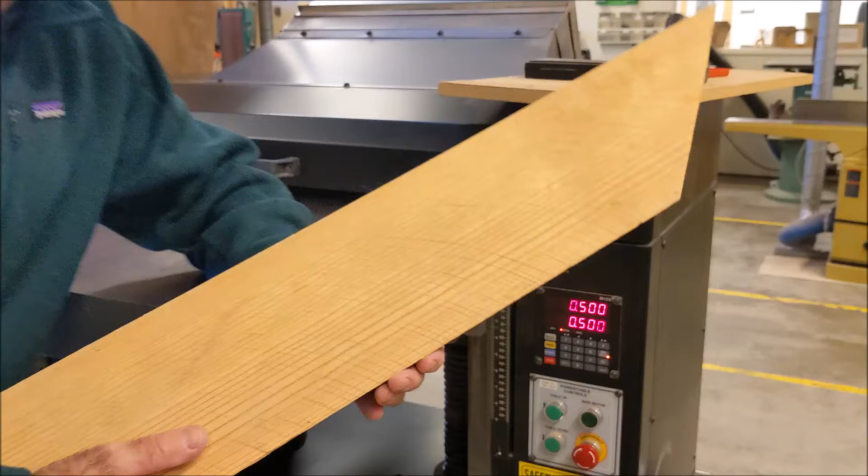Today I'm going to take those scraps from that shed I built out of the hand-milled pine. I brought all the scraps into the school and we're going to do wood projects out of those scraps.

So step one, before I do anything, is surfacing, and the way I'm going to surface it is I'm going to plane top and bottom, then I'm going to joint this edge, and then I'll show you what easy project I'm going to make out of this. Again, these are pine trees that came down on my property, milled them up right there, built a building out of them, and reusing the scraps on them.

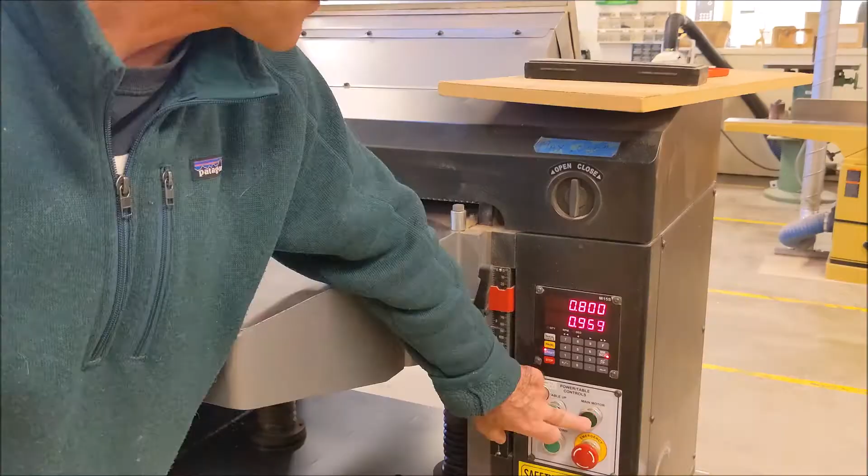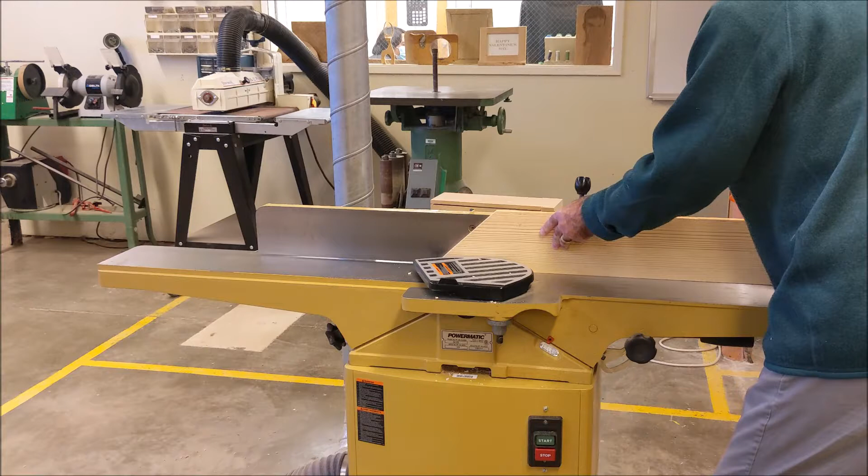Over to the jointer to get a straight edge. Surface 1, 2, 3. Over to the table saw to get the fourth edge. Surface 4 sides. I'm going to leave these on as tabs to hold it down.

Here's the project. Holds 2 wine glasses over a bottle of sparkling cider. This is our rough prototype. So we did this with hand tools, and we're going to work backwards from here to design and build it on the CNC. Here's my working prototype. Not that well refined, but the CNC will come out great.

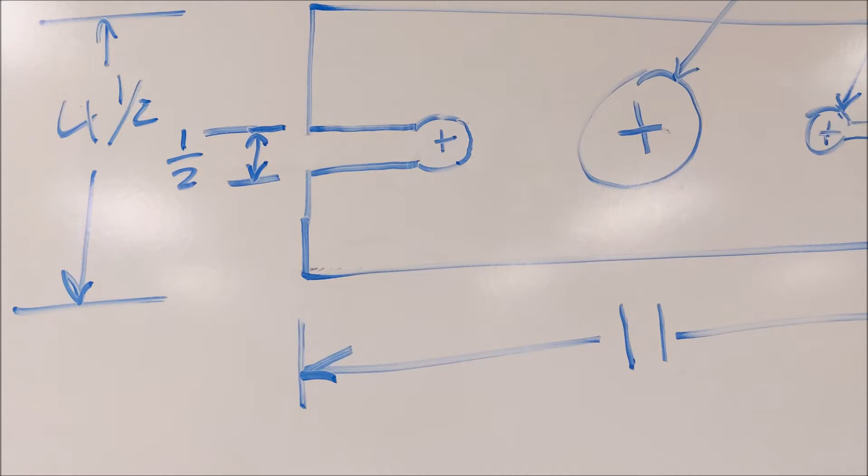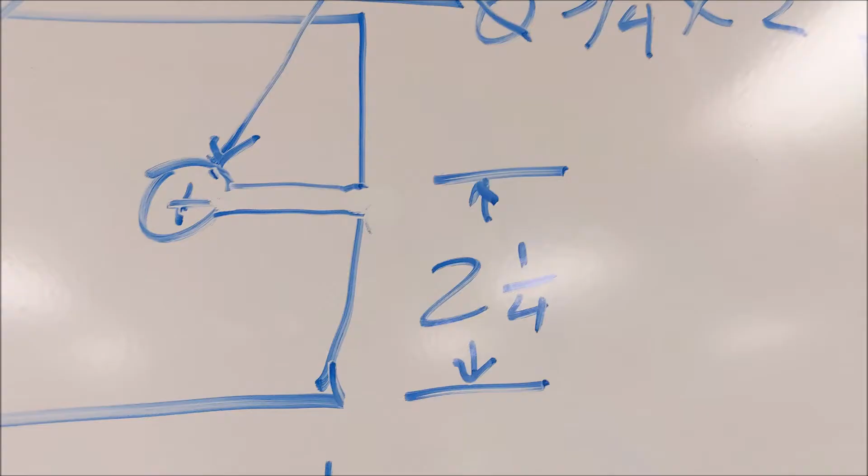From my working prototype, I need to sketch it out in my notebook. So here it is sketched out. It's 11 by 4.5. That little circle right there, and that circle on that end for the wine glass is 3/4. So that's diameter 3/4 times 2. So we'll put a right side view to show the thickness of the board, 3/4. So all drawn out. Now over to Mastercam to draw it on the CNC and then run it.

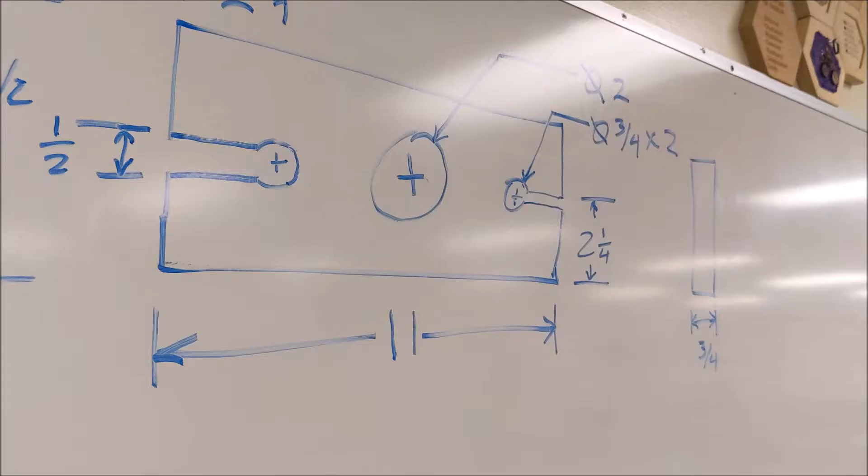Okay, let me run through this in Mastercam as quickly as I can. This is Mastercam X7. If you're using a different software, a lot of the tools and functions and the toolpathing is probably all the same. All the ideas are the same. So looking at my screen here, first thing I do is I go machine type router, and I select the tool I'm working with. It's Techno RMD7. That brings up my property manager.

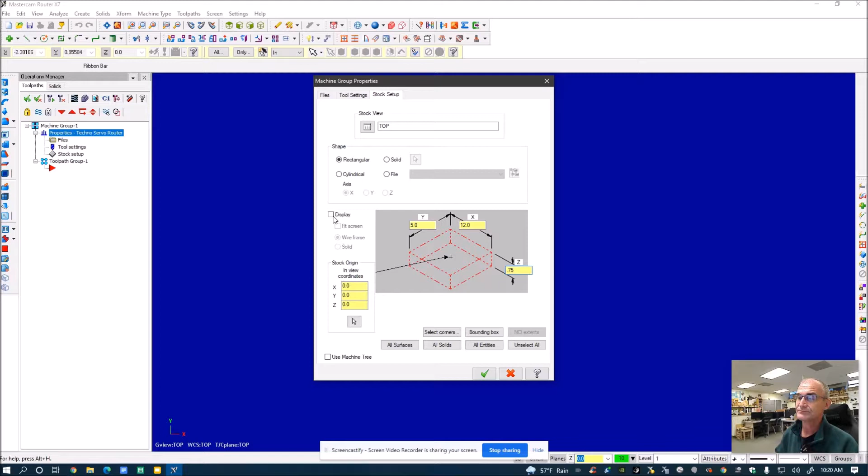I click on properties, stock setup, and I'm gonna, on my big screen here, bring it over here. This stock setup is the size of the wood, not the piece you're cutting out. So in the Y direction, let's say my stock is 5 by 12, but I planed it down to 0.75. Important that I have the cursor in the top center right here. And if I click display, it'll show this box on my screen. Next thing I do is hit F9 to get my Cartesian coordinates.

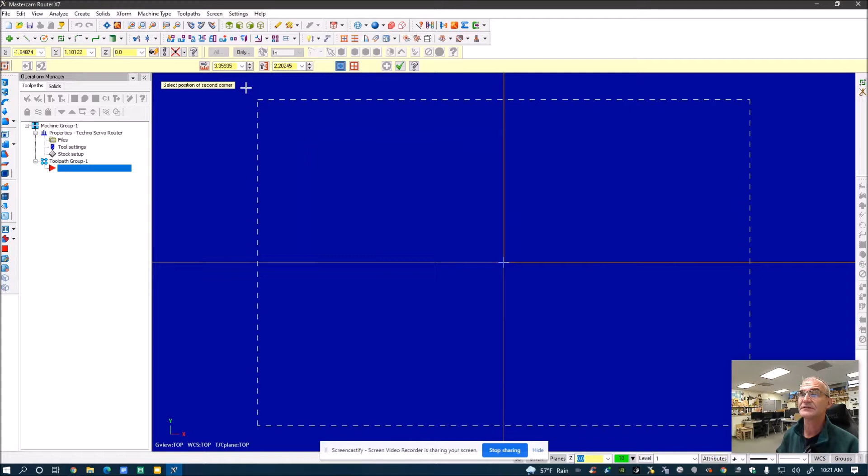Now I'm going to start drawing my geometry. So to do that, I do that under Create. I'm going to create a rectangle. I'm going to have it starting at the origin, but I want it centered at the origin. So this button right here anchors it to the center. The actual part is 4.5 by 11. So I'm going to enter that here, 11 and 4.5, and then I hit enter. I'm done the operation, so a green check mark. And then this snowflake up here is fit to screen.

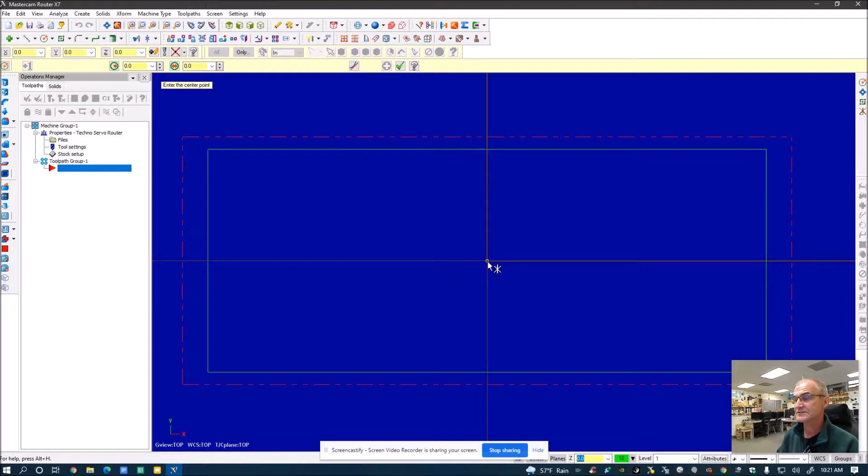Next thing I'm going to do is create the circle in the middle. So that's an arc from a center point. I'll snap on the origin, I'll draw out, and I have the diameter at 2 inches, and I'll hit enter. Green check mark, I'm done the operation.

Next, I have a circle over here, but I don't want to just put it anywhere, so I'm going to create a construction line. So I go create line from an endpoint. It'll snap right on the midpoint there. I'm not going to draw it over any dimension. I'm going to draw it over a very specific 2 inches. So I enter 2 here and at 0 degrees. And then I hit enter. That line, I got to make sure I erase. It's just giving me an endpoint here.

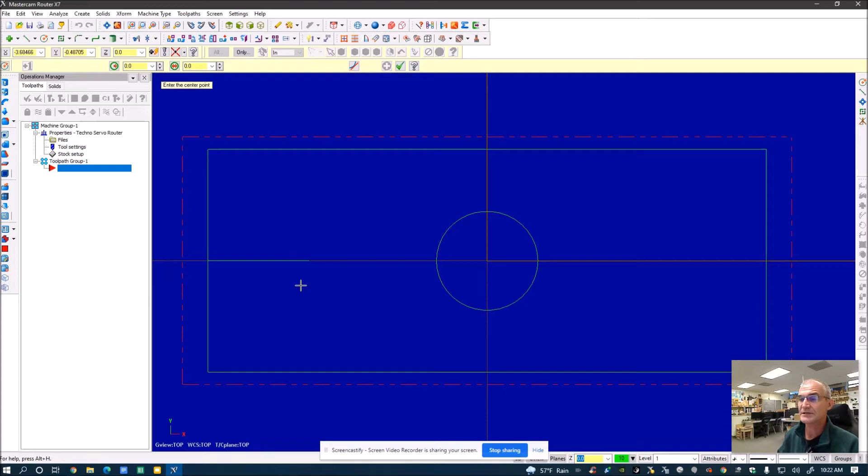I'm done the operation. Back to create an arc from a center point. I snap not close to, but exactly on the endpoint with that little box, and I draw it out. And that circle has a 3/4 inch diameter, or 0.75. And then enter. I'm done the operation, green check mark. This thing coming in is equally spaced on both sides. So I'm going to go X-form offset. Box is up here. Bring it in.

I want to copy that line, and I want to copy it at the total width is a 1/2 inch. I'm going to do a 1/4 inch. This line, and then I'm going to click up to copy it up, and then I'm going to click down to copy it down. Done the operation, green check mark.

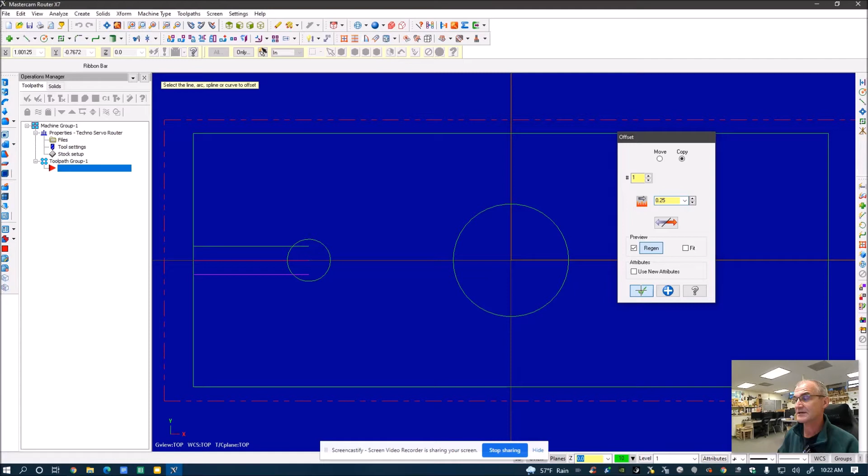Then I need to delete my original line. So I'm going to click on that line and hit delete. And then this button up here is clear colors; the colors tell you the last order of operations you did. Now I need to trim these lines off. These scissors here are trim. I'm going to specifically use this divide, delete, trim button here.

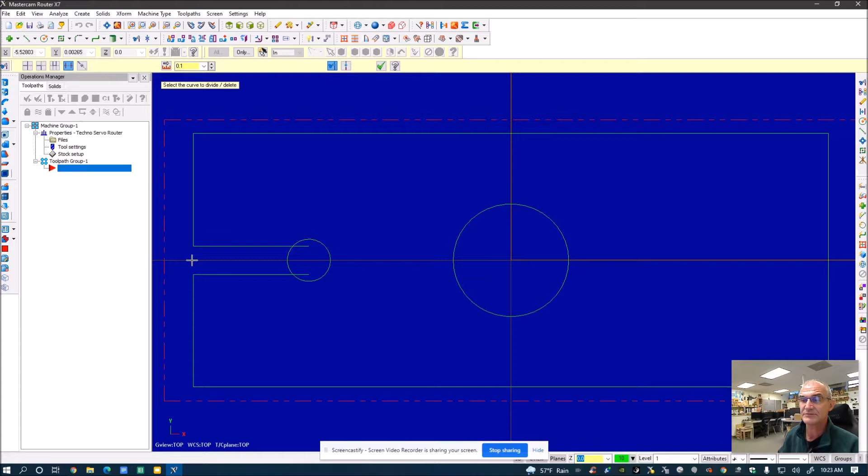And then as I go over there, you can see it becomes dotted. So that's going to remove that, that, and that. It's all trimmed. And I could draw that again over here, or I could just reflect it. If I'm going to reflect it, probably the best way to do that is to delete this line, create a line to reflect it over. So I'm going to create a line from this midpoint, not close, but exactly snapping on the midpoint. And again, this is a construction line.

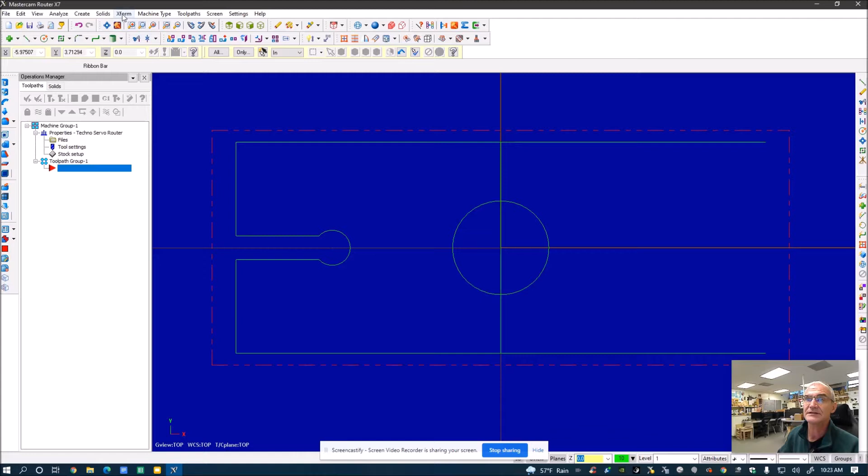So what I'm going to do here now is I'm going to mirror it. So I have the existing geometry. I'm manipulating that geometry. So that's X-form mirror. What do you want to mirror? I want to mirror this line, the circle, this, and this. Once I'm done selecting, I hit the green ball up here to say end selection. This thing pops up, and what do you want to do with it?

I want to copy it. I want to copy it over a vertical line X. So I click that, and it's going to reflect it over there, and then green check mark. You got to be careful you don't do this a bunch of times and stack a bunch of lines on top of each other, because then the tool pathing won't work even if it looks good. Again, the clear colors. Everything here looks good. I'm all done with my geometry. Do need to delete that construction line.

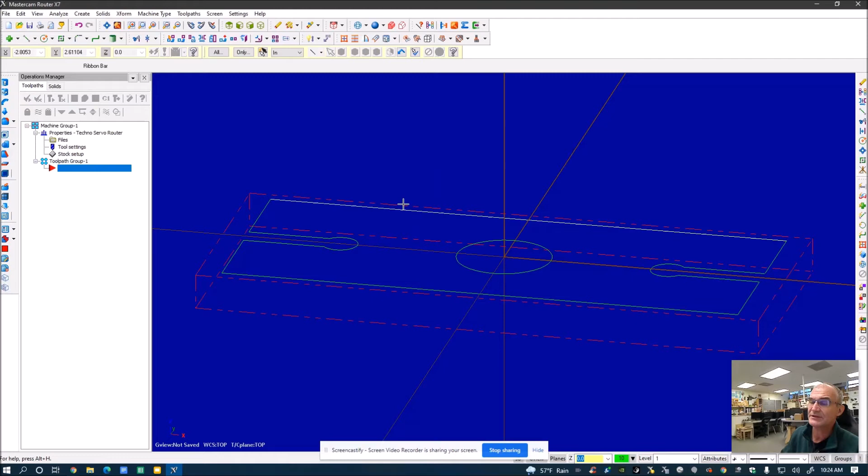One thing that you might do is if you hit that roller mouse and drag it around, it'll pull it into 3D, and you can see that surface is flat on the top. If you start drawing now, you'll be up in space. So to go back to a top view, this box right here is top view, and then now you're drawing on top of the box again. Now I'm going to tool path, so I'm going to hit tool path. I'm going to do a contour. I'm going to name it.

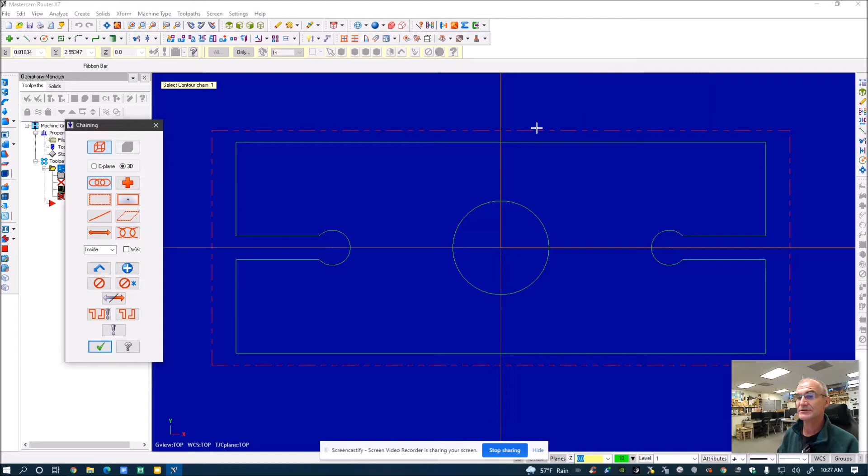I have to do the circle first, so it stays fixed on my tabletop. So I'm going to do the circle first. I'm going to do it as a chain. I'm going to click over on this side of the circle and make sure that I am going counterclockwise. And then on my part, I'm actually going to click close to this endpoint, and that's going clockwise.

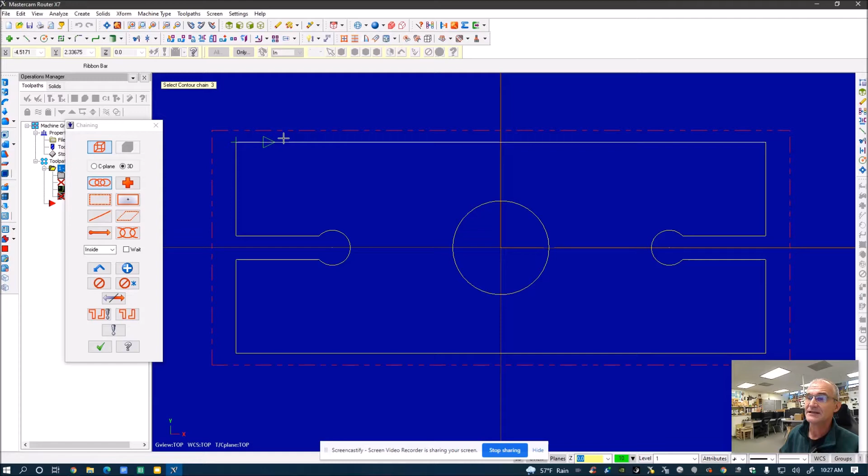So I'm going to be able to tool path this whole thing in one single tool path, as long as I go counterclockwise on this to put the cutter on the inside, and clockwise on this to put the cutter on the outside. So I'm all done with that. I'm going to roll through here. Tool, I'm going to use a 1/4 inch straight end mill. Feed rate.

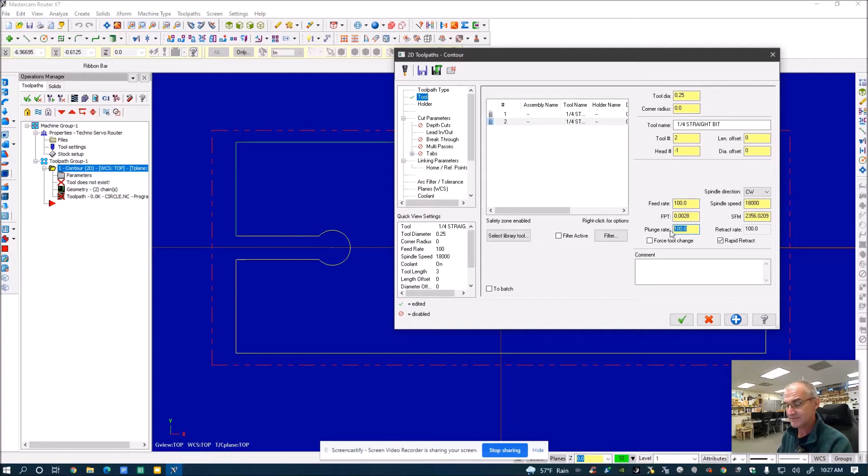So I want to make sure it's a 1/4 inch bit. My feed rate is going to be 100 inches per minute. Plunge rate, half of that, 50. Blue is going to hold that setting. Holder, nothing to be done there. Cut parameters. So I want it on computer and left so that when I go counterclockwise, it's on the inside. But when I go clockwise around the part, it's on the outside. So that's really important.

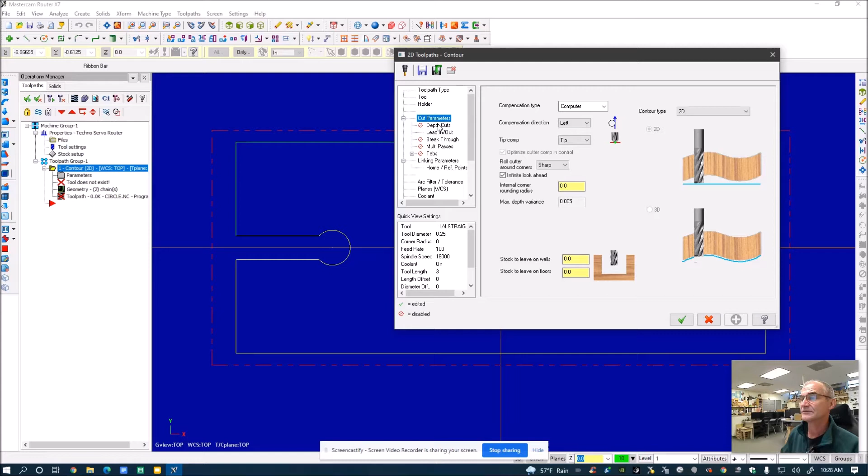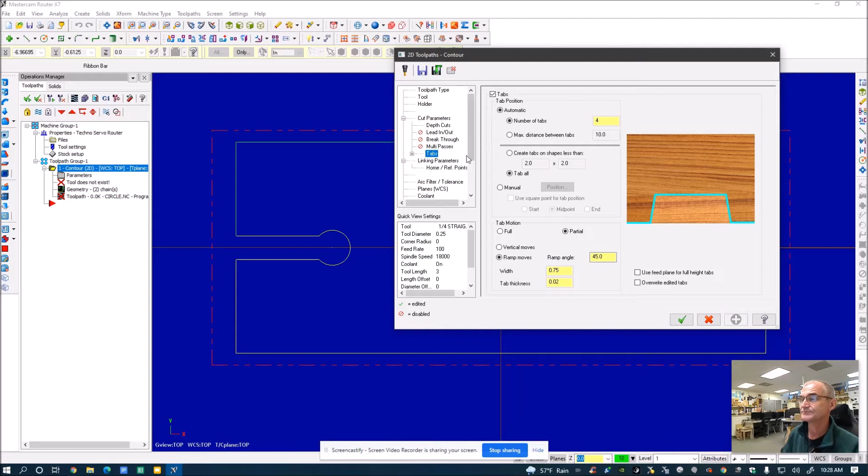I'm going to go depth of cut. I'm going to select that. This is less than the diameter of the bit, 0.25. The part's 0.75 thick, so it'll do 3 passes. Hold that. Lead in, lead out, I'm going to deselect that. Breakthrough, nothing. Multi-passes, nothing. Tabs, I am going to tab it. And I'm going to hit automatic tabs, and I'm going to tab all. So that'll help hold the pieces down. And lastly, linking parameters. These all have to be absolute because top of stock is 0.

This is negative, and my board is 0.75 thick. Then I'm done. The check is it runs this first. It's going counterclockwise inside the line. Travels over here. It's going clockwise outside the line. That all looks great. I'm going to save it.

I go File, Save As, and I'm going to save the file. That's going to save the Mastercam file. And then additionally, I'm also going to post it. So before I post it, though, I want to verify it. So I'm going to click on this. This is going to verify or create an animation of it. It's going to take all this vector information and convert it.

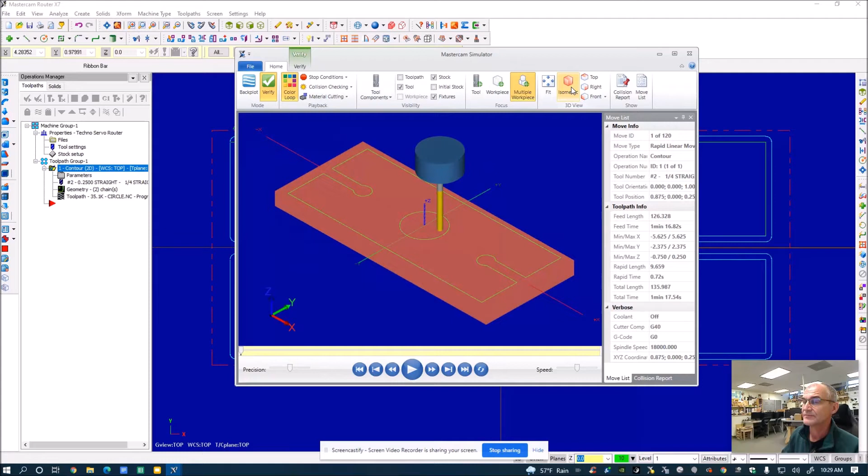But let's go here. So I'm in an isometric view. I'm going to hit play. Cuts the circle in 3 passes. Cuts the part in 3 passes. These are the tabs left over. So that should help hold all these parts and pieces down. That all looks good. Now I'm going to post it.

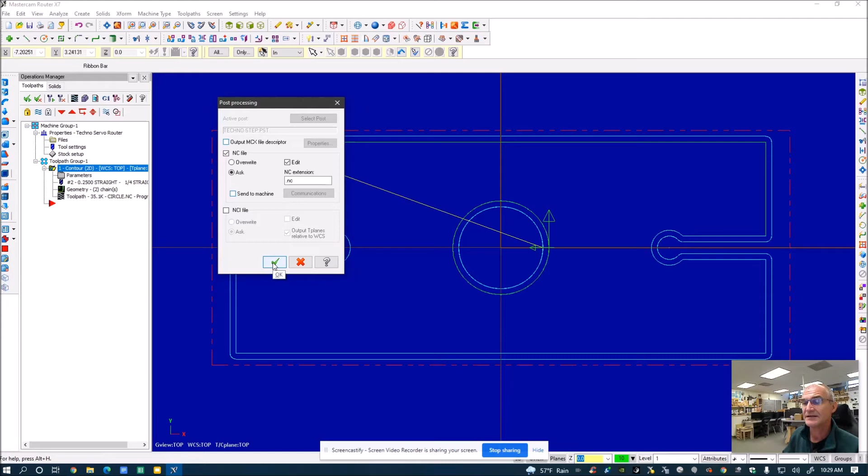This is converting it into NC file, converting the vectors into Cartesian coordinates. And then this, I need to post it onto a flash drive. And I'm going to hit save. And now what it's doing is taking all of this vector information, converting it into numeric code, which are Cartesian coordinates with operations on how to run from one place to the next.

So here's all the lines of code. And you could see how many lines of code we have here. 155 lines of code. The tool out in the shop is actually running this code. So let me close that. And let's go out in the shop and run the part now.

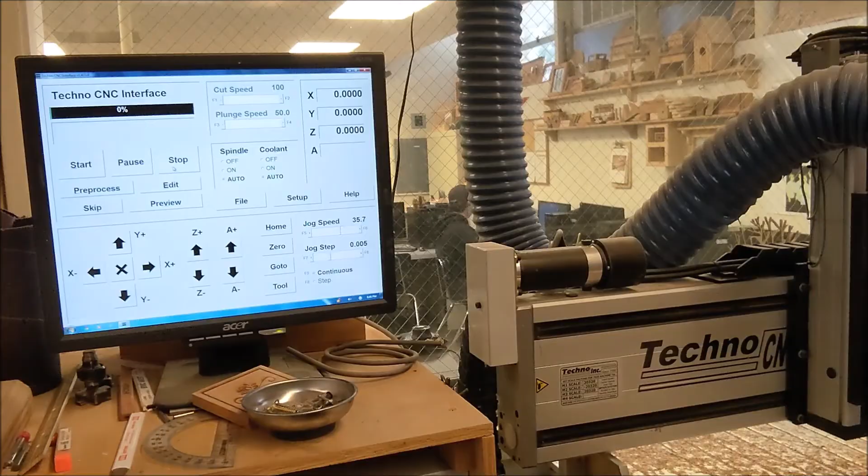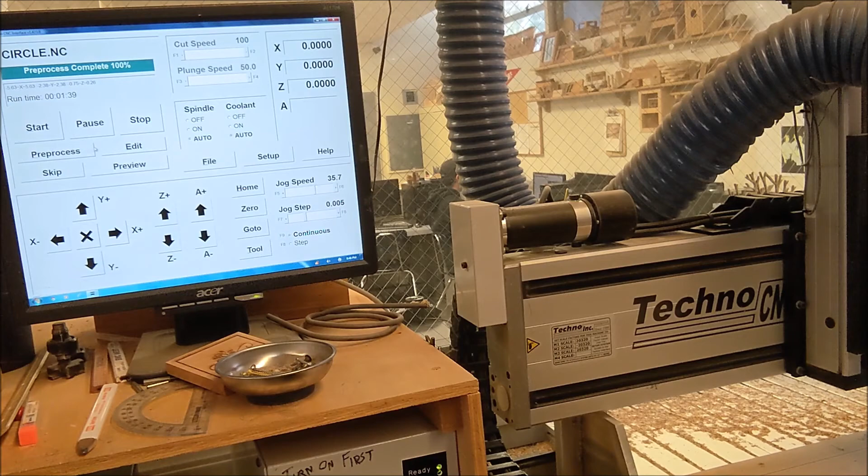Okay, I'm out in the shop. I turn the computer on. I turn the controller on before I open up Techno CNC. Techno CNC is opened up here. To load my file, I go File, E drive, and then wherever I saved it on there, it has to be an NC file, so pre-process it. I check the time, 140 is probably good, preview's good. It's in the center, 3 passes, cuts this out, then cuts the part out.

That all looks good. I use a screwdriver pilot hole. I drill a pilot hole first. Then I'm going to put a screw in. And I need to make sure there is no chance that the router is going to hit the screw at all. And I make sure that I have a square on here and I square it up to the edge of the board.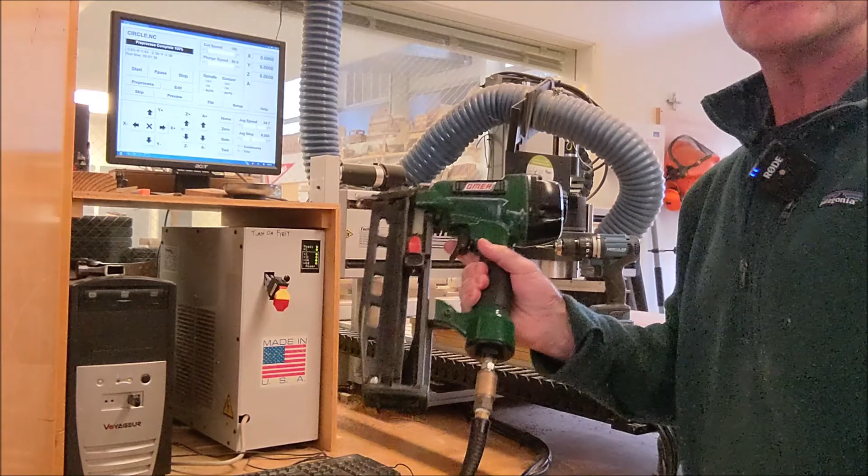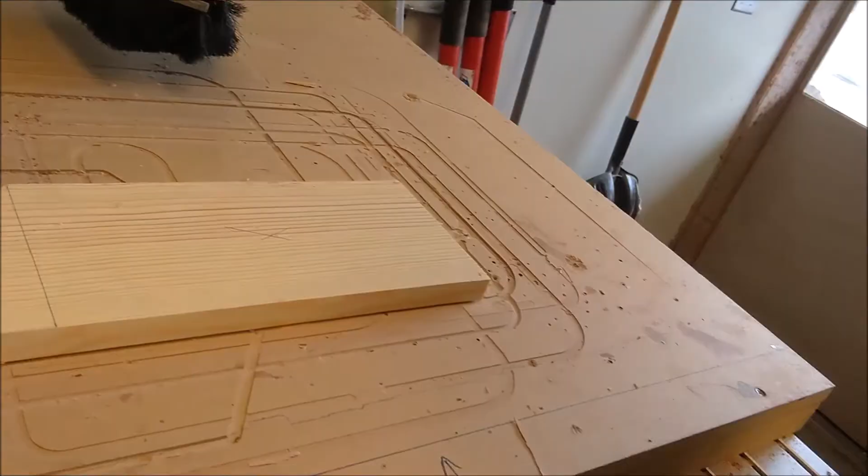To be safe, I'm actually going to use these plastic nails. So if I do hit this with the router bit, it won't damage it. So this is a super cool part. Hold this on. I have the center of the board drawn, so those pencil cross marks are the center of the board. Now I need to bring the bit right on top of that. Now I need to use these arrows here to move it around and get it centered on my board. Right there, the bit's centered right on that mark.

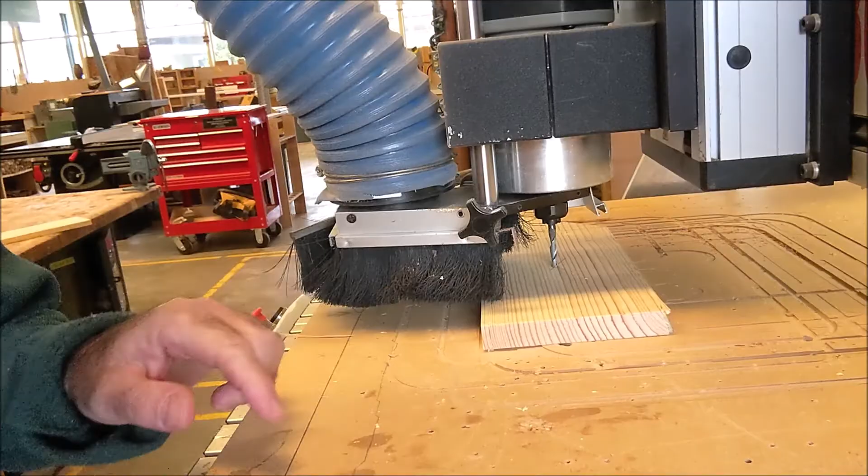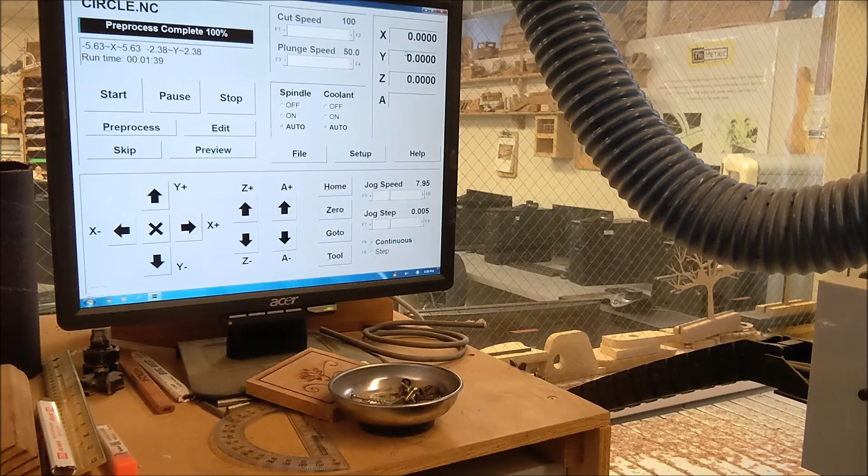This is a very important step right here. I have to go to this computer screen and tell this computer that is my origin. So now that it's 0, 0, 0, now I can run it. Make sure you have glasses on. Check with somebody. Don't do any of this unless you've been trained in it. This video is nowhere near enough to do this. It's just a reminder of the key points.

I'm going to hit start. I'm going to guard this pause switch and the red button in case I need to stop it. So let's go ahead and run it. Okay, I'm all done running it. You can see I paused it right before. You can see the multiple passes.

Before I do anything else, I have to Z up. So I always Z up first, Y back, clean up after myself. I left the last little piece on there. And there's my part right there. I could router it and clean it up. I could do a quick router detail. That bearing's too big to fit in there, but I'll do the outside in that circle, making sure I use a hold down stick, glasses on.

Router bit's too high up, and that's why I got a chip. So that's really a little unfortunate. Not the right router bit, taking too much off.